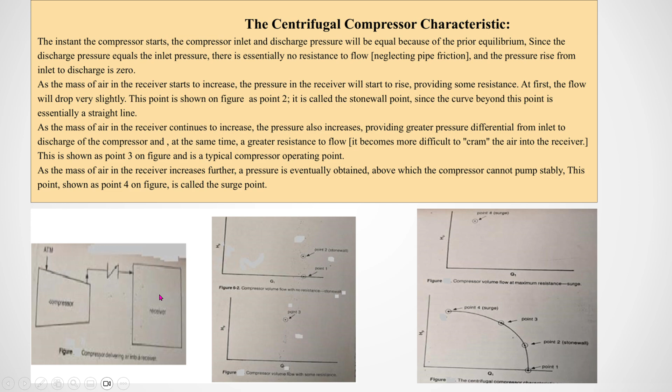This means when the receiver is full, the flow going into the receiver through the piping is reducing, is reducing, is unstable, is reducing. When the velocity becomes too slow, the compressor can no longer perform stably.

Since the compressor pumping action is unstable, a flow reversal can take place. It cannot go further to discharge, so reversal flow can take place. And with flow reversal, the volume in the receiver decreases because reverse flow has taken place.

So the volume in the receiver decreases, and so does the pressure. When volume decreases, pressure also decreases. Then the compressor again provides positive flow. When the volume decreases from the receiver and the pressure decreases, the compressor will again start discharging.

In severe cases, surge can cause destruction. This means it is a back and forth flow motion called surging. Sometimes the flow is reversed, sometimes forward. This back and forth flow takes place, and this is called surging, which can severely cause damage and destruction.

A good rule of thumb is that when the flow through the compressor reaches 110% of the surge flow capacity, the good thumb rule is to start the recycle process.

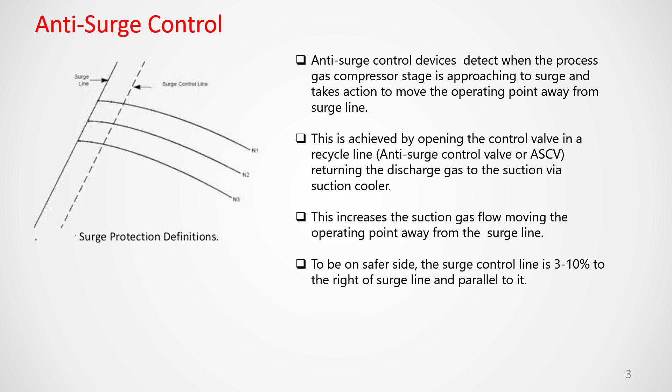If the flow reaches the surge point, the anti-surge valve will control it, recycling the discharge to the suction, so the flow through the compressor will increase. That means the energy will increase. Anti-surge valve open means energy will increase. Or there may be a vent valve - if you open it, then also energy will increase, as well as the flow through the compressor increases. The energy is increased, as well as you are losing some material.

You see, this is the compressor, and from the compressor this is the upstream side. We are taking the PT, which means pressure transmitter, the temperature transmitter, flow transmitter, and on the discharge side we are taking the temperature transmitter and pressure transmitter, giving the signal to the anti-surge control valve.

The anti-surge controller studies the position of where the compressor is running, and accordingly gives signal to the anti-surge valve, and the anti-surge valve will open. After the cooler discharge - if you don't take it after the cooler, the temperature will be the suction temperature, so it will go through the suction again. But the anti-surge valve should be provided at the discharge line and after the cooler, not before the cooler.

If you take it before the cooler, hot air will go - hot process fluid will go. So it should be after the cooler, after the cooler.

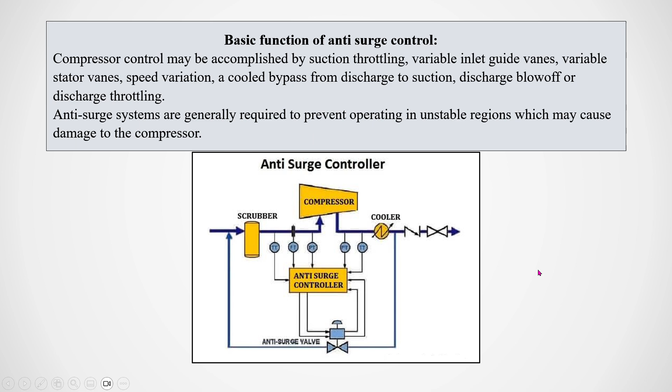If it reaches this point, it will start opening the valve. Opening the anti-surge valve means there is energy loss, but you can shape your compressor this way. This much margin is required because to operate any valve, it will take some time. Though we are making the anti-surge valve open quickly, it will still require some time - that's why we have taken a 10% margin.

You see, this is again the pictorial view. This is the flow transmitter, then pressure transmitter, then temperature transmitter, and on the discharge side, the pressure transmitter and temperature transmitter. All this signal will go to the anti-surge controller, and the anti-surge controller will give signal to the anti-surge valve. And after the cooler, the anti-surge valve, from the discharge line, some flow will take place.

This flow goes to the suction of the compressor again, to this turbine, this compressor, so that the flow will be away from the surge line.

There is a difference between a general control valve and the anti-surge valve. The main difference is that the surge control valve is required to be opened as fast as possible to avoid surging. That's why we keep a 10% margin, but a normal control valve will take some time. The anti-surge valve will open quickly, but still it requires some time - that's why the 10% margin has been taken. This is not like a general control valve; the difference is that the anti-surge valve will open as fast as it can.

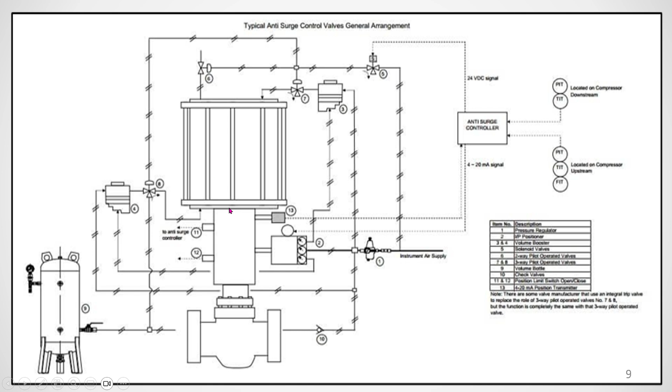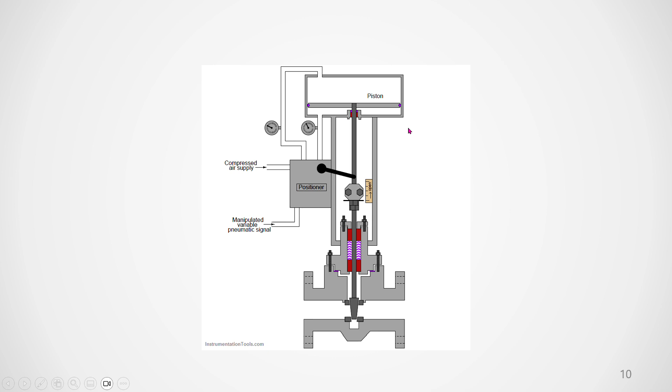When this valve opens, this side pressure will increase, the valve will go on increasing, this air is going to decrease, and with this feedback system, this will keep the pilot piston again in the center position, so that this movement will be arrested at the position where it is required, and accordingly the flow will take place through this.

So why are inlet temperature, pressure and flow, and outlet temperature and pressure measured to control the surge control of a compressor? Why do we take these three parameters - pressure, temperature and flow at suction, and discharge temperature and pressure - to control the anti-surge valve?

In a compressor, the anti-surge control system measuring the inlet temperature, inlet pressure and flow, and outlet temperature and pressure is essential, because surge is fundamentally related to flow versus pressure rise under given gas conditions.

Now what is surge? Surge occurs when the compressor cannot sustain the forward flow - it cannot discharge forward flow. So flow reversal will take place, causing vibration, damage and instability. And the surge limit depends on the actual gas condition, not just the raw flow.

Because of this, the measurement requires the inlet pressure and inlet temperature. This is defined to control the density of the compressor suction. If pressure increases, density will increase; if pressure decreases, density will decrease. If temperature increases, density will decrease; if temperature reduces, density will increase. So this will control the flow.

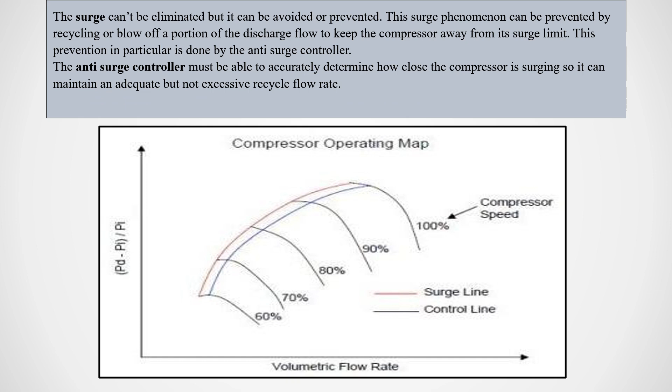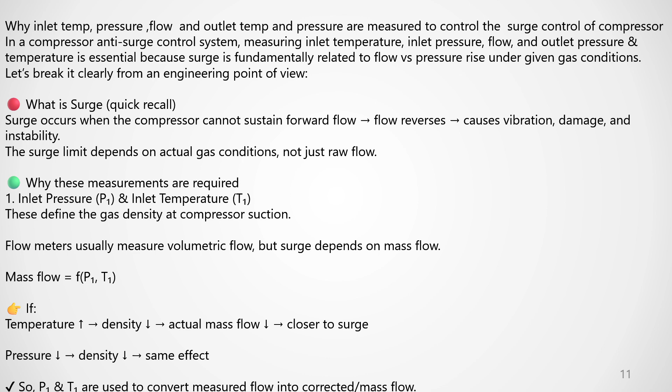So the surge line shifts depending on the pressure ratio, as shown in the pressure ratio surge line curve. The pressure ratio is P2 minus P1 by P1. The surge line, on the right hand side and left hand side vertical lines, depends on the pressure ratio, that is P2 by P1.

So P2 helps determine where you are on the compressor map. P2 and flow both will decide where you are at present.

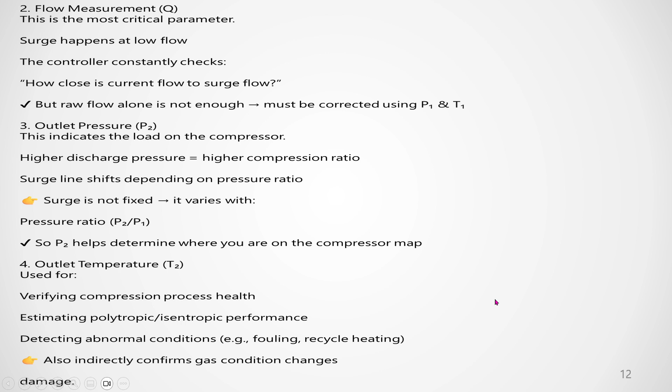Verifying the compression process health to estimate the polytropic and isentropic performance. It also indirectly confirms gas condition changes. Now you get the corrected flow as per the pressure and temperature, and corrected pressure also, discharge pressure P2.

by P1 also, and you can come to know where your compressor is running. The anti-surge control valve does not use raw value, it operates only on the corrected value - corrected flow, pressure ratio. So the anti-surge valve will not depend on raw value; it depends on the corrected flow, corrected by temperature and pressure ratio.

These define your position relative to the surge curve, where you are at present. What the controller actually does is use all parameters to calculate corrected flow, because corrected flow depends on Q, P1, T1, and pressure ratio P2 by P1.

That's why suction pressure, temperature, flow, and discharge pressure and temperature are important to see the corrected flow and pressure ratio. It compares the operating point with the surge line, gets the corrected point, compares it with the surge line, and then opens or closes the anti-surge valve. This is how the anti-surge valve safeguards your compressor.

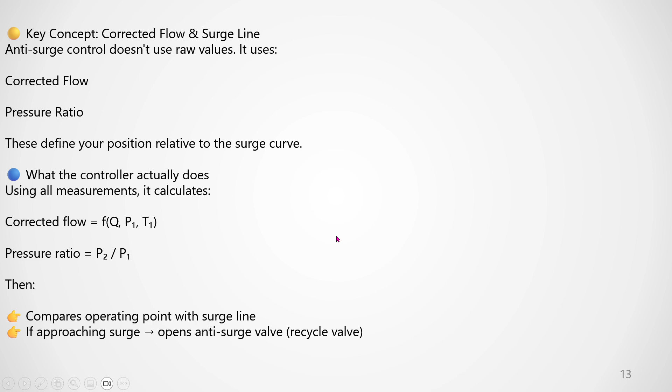So why are all parameters needed together? Inlet pressure is required for density correction. Inlet temperature is required for density correction.

Flow detects low flow conditions - the flow meter will show where the flow is. Outlet pressure defines the compression ratio. Outlet temperature performs performance and safety validation.

Surge depends on how much gas or mass is flowing and how hard the compressor is working - pressure rise and flow. Inlet conditions define how much flow or gas, outlet conditions define how hard you're working, P2 by P1. Left hand side gives how much flow, right hand side pressure and temperature give how hard your compressor is running, leading to the final decision.

All these measurements are required because the function is of corrected mass flow and pressure ratio, not raw flow. It does not depend on raw flow; it depends on corrected flow. Without correcting for temperature and pressure, the anti-surge system would give wrong decisions and potentially lead to a false trip of the compressor.

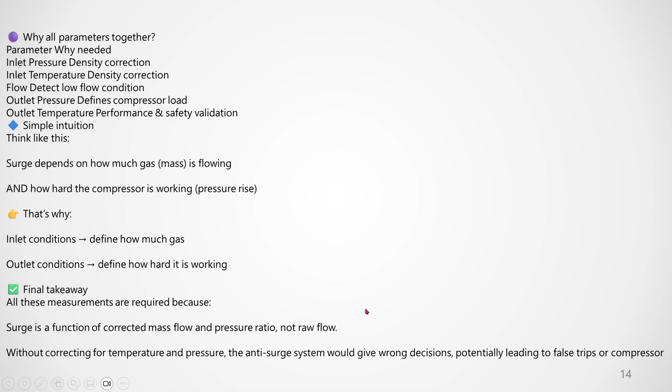So I think I have cleared your knowledge about surging. This only happens in compressors with compressible fluid, and at the Stonewall point. The Stonewall point is high discharge volume, low pressure. The surging point is low volume, high discharge pressure.

Both are unstable conditions of running. If you go beyond the Stonewall point, your flow and pressure will come down unpredictably. Similarly, surging is very dangerous because if you reach the surging point, reverse flow takes place.

The compressor will move to and fro. It will damage your thrust collar, thrust bearing, and internals of the compressor, and this happens periodically. So you need to open the anti-surge valve so that flow through the compressor increases and you move away from the surge point. Normally we keep the surge point at 10% of the surge flow because opening the valve takes some time.

Anti-surge valves are not like simple control valves. They are required to open and close very quickly to keep the compressor running in safe condition.

That's why boosters with actuators both upward and downward are provided, so that upward goes to drain and downward below the actuator gets pressurized, causing the valve to open immediately. Similarly, the valve will close when the upstream diaphragm is pressurized and downstream goes to drain, closing it immediately.